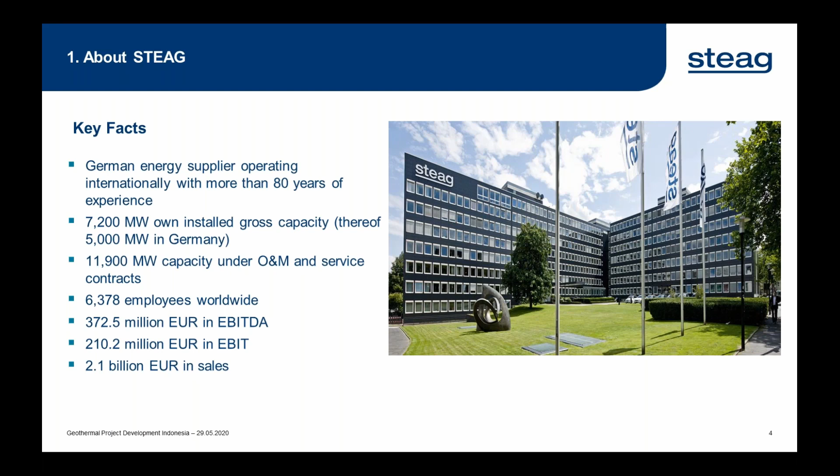The framework conditions in the power market in Indonesia are in general very promising. Indonesia has an installed power capacity by the end of 2018 of about 65 gigawatts. Most of the power is distributed in the Java-Bali grid and the Sumatra grid. This power grid is operated by PLN, the state-owned monopoly for power distribution in Indonesia. The rest is distributed by direct use. One of the reasons for that is that Indonesia is simply an island archipelago where a continuous power grid as we know it from other countries on the continent is simply not possible.

The power market in Indonesia is growing. Electricity sales have grown 6.4% on average since 2010 and were expected to continuously grow further prior to the COVID-19 pandemic, which has of course also slowed down the Indonesian market. The reason for this high development is on one hand that there is still a big market of private users to be connected to power, but Indonesia is also making a transition to more own manufacturing of its resources and goods, where power is partly the bottleneck.

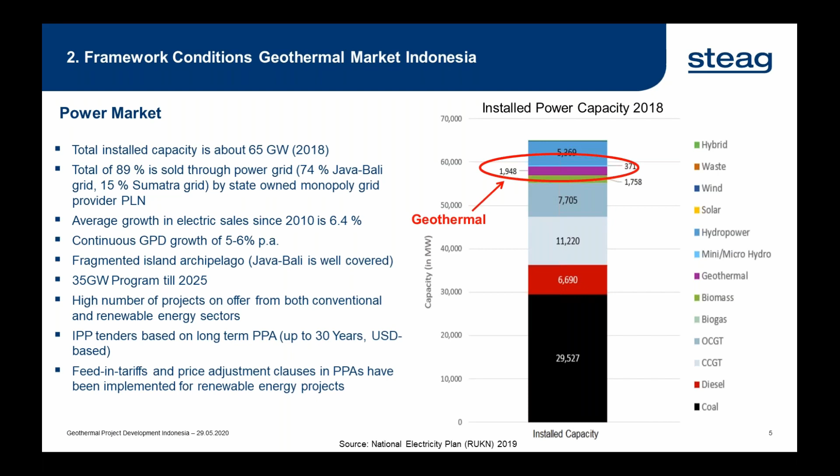As can be seen here, the geothermal part in the energy power mix is still small in the Indonesian power market, but it is not insignificant. It is growing with a target of 2,500 megawatts by this year, which was given prior to the COVID-19 pandemic. But on its own, as shown by Alex Richter in the first webinar a couple of weeks ago, it is the second biggest installed capacity in the world today, with the world's biggest potential that can still be developed.

In the future, by signing the Paris Climate Agreement and the planned fuel switch also in Indonesia, geothermal and hydropower could supply 25% of the country's energy demand.

The Indonesian government is trying to set the framework conditions to accelerate or execute this agenda. One of the key changes in regulatory framework was made in 2014, where geothermal development was taken out as mining business and put under power development business. This change was very important for the geothermal IPPs to come because it centralized the license from the local governments to the central government, and it did streamline more and more regulatory framework to have more predictability for the investment and more security.

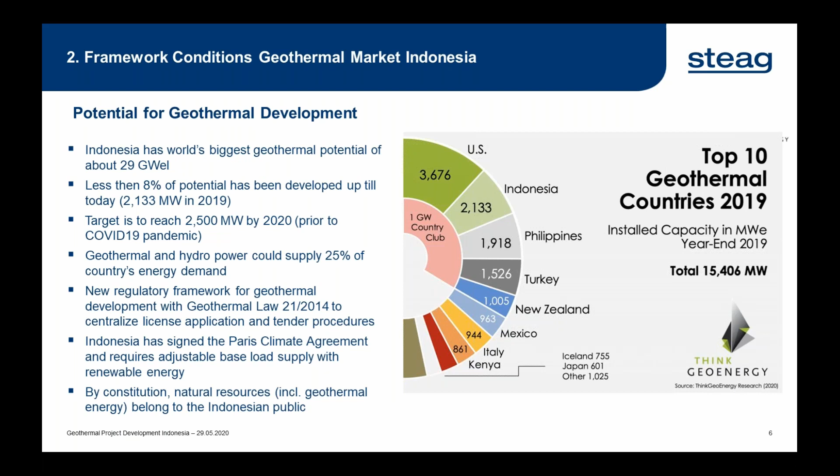The total investment will be based on the capacity that we can install from the resource. With the range that is given, it is somewhere close to $600 million, up to 980, almost $1 billion of investment.

The project is mainly held by STEAG, but by regulation and also by business strategy, we have a local partner in the country that is supporting our development. The project has a signed power purchase agreement on a 90% take-or-pay basis, giving us investment security and a validity of 30 years of power sales, which are good conditions for the long-term investment required in geothermal, and the pricing is in US dollars.

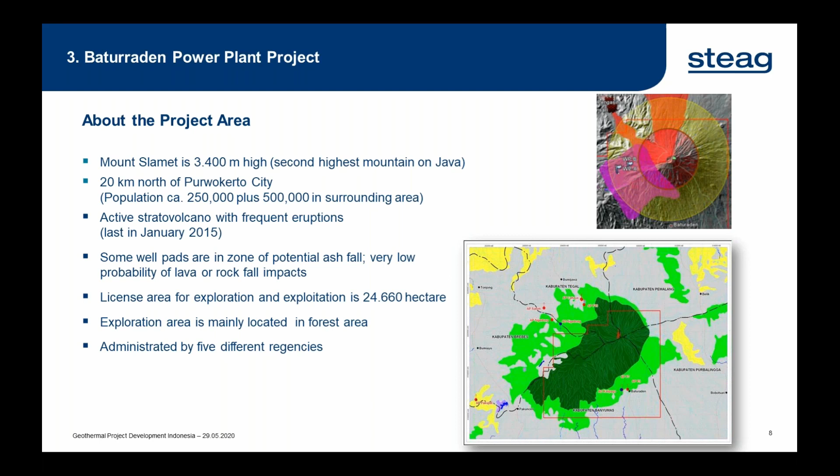When you start a geothermal project for the first time in Indonesia, or start looking at a potential participation in a geothermal project there, in most cases people realize how remote the areas are and how difficult they are to reach. In our specific case, we had to improve the conditions of the last 18 kilometers of the existing public road, which runs from the main highway, even though it's more of a smaller highway, up the volcanic mountain. And to allow the arrival of trucks for the drilling rig and later for the power plant, private land had to be purchased to widen the road.

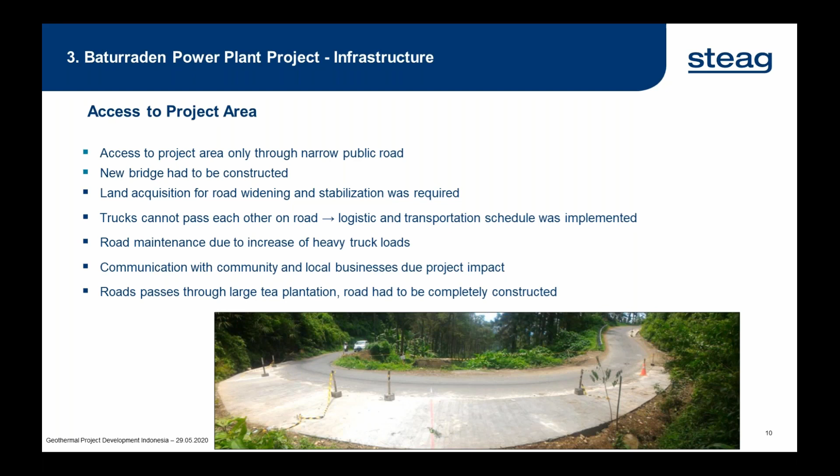An example is shown in the picture here, where you can see in the lower part that we widened the road with concrete to realize the turning radius for the trucks to come. You also have to do very much maintenance, because those roads in remote areas are not designed or constructed for such a big development. In our case, which is sometimes necessary, we even had to build a bridge to pass a river. The Baturraden project is located behind a tea plantation area, which had only a rudimentary road, so we built a completely new road into the forest, which was heavy work, but gave us the opportunity to build this road based on our specific needs and purposes.

I have here pictures to give you an impression of the location of such areas. In the left picture, you can see the bridge that we constructed. There is a big steel pipe where the river flows through, and around the steel pipe we built gabion walls to resist the weight of the drilling rig later. The main part of this road has a width of 4.5 meters, not giving trucks the opportunity to pass each other.

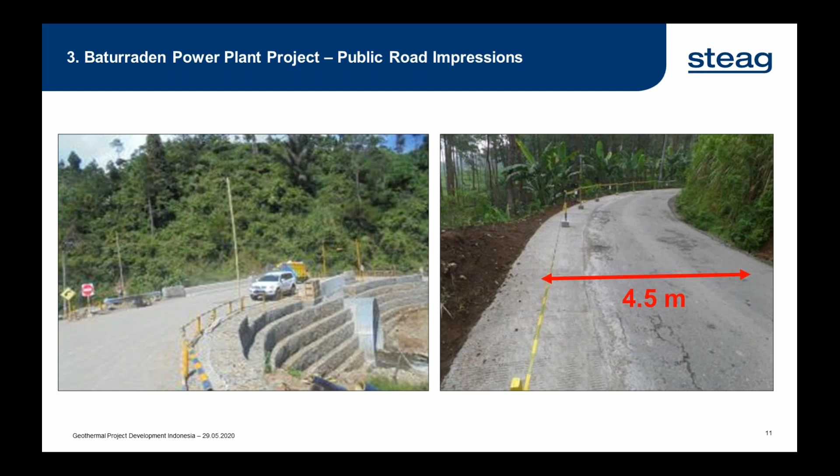So if a truck is on the road, there can only be trucks going uphill or downhill, and that requires many logistic challenges. On the forestry road, like I mentioned, we were able to construct more generous roads where trucks can pass, but of course, in exchange, the civil works required to achieve this were not insignificant.

The well pads and future power plant are located in the Baturraden project, after passing this tea plantation, in a forest. This forest is very remote, which gives some advantages. You might also see in other geothermal projects in Indonesia that you don't have direct impact on a population. That's project specific. There are also large scale power projects, like in Sumatra, where you are very close to villages, but we have the benefit of developing without neighbors, if I may say so.

But of course you have to cut trees in the forest, and you have to do revegetation over twice the area of space that you utilize for your development. On those volcanic areas, you have very rough topographic conditions. This picture I'm showing is an actual picture, like all the pictures in this presentation, from our development in the field. The height of the cut slopes there is about 60 meters.

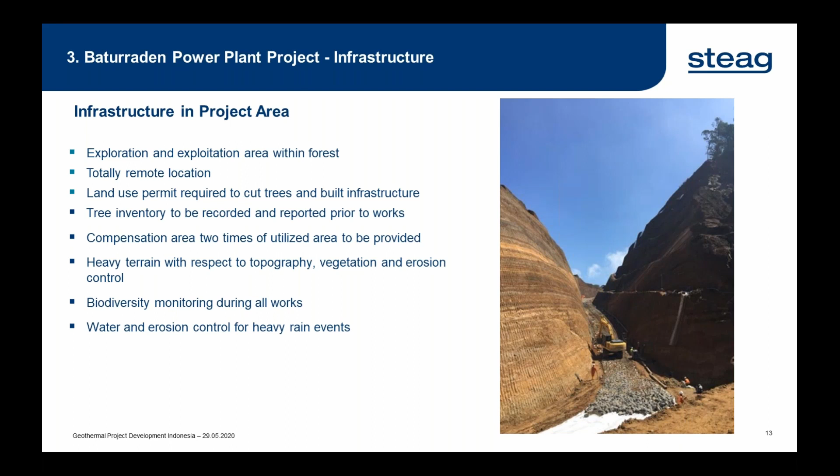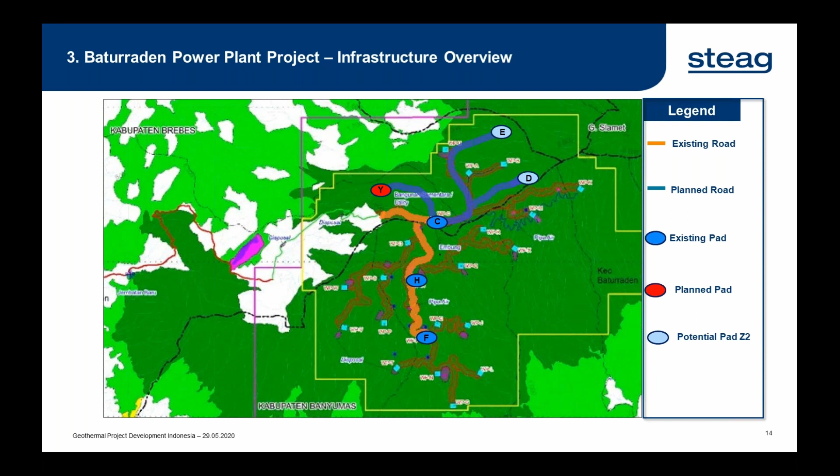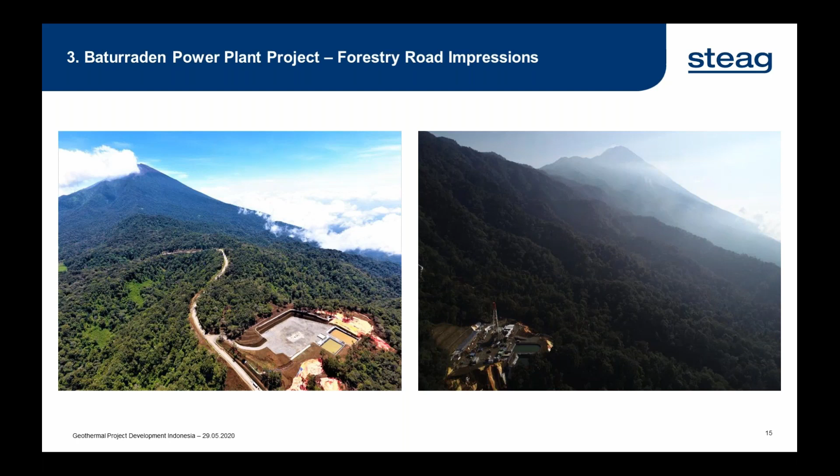When it comes to drilling, which is one of the biggest cost factors for geothermal development, also in Indonesia, you have access to a very professional and well-established drilling market, mainly because Indonesia is an oil and gas producing country. This also means that drilling prices, like in most countries, are impacted by the demand of the oil and gas industry and consequently the oil and gas price.

And like in most countries developing oil and gas, you have high restrictions or high requirements for safety and logistics to operate drilling rigs. That's making geothermal drilling in Indonesia very cost intensive. That's one of the factors impacting or limiting the speed of geothermal development in Indonesia.

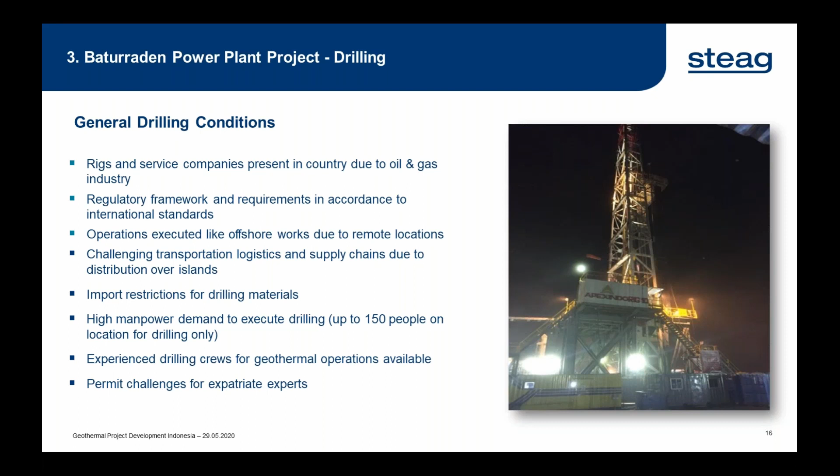It is the country with the most expensive geothermal wells, in my opinion. The reason is that you need a high amount of logistics because you're on an island archipelago. Drilling rigs have to be transported by maritime routes and trucks through those remote areas. You also have to import almost every piece of equipment. The good thing is you have a very good market with good people in the country.

Our experience during drilling, in the specific conditions when we started the drilling campaign, was that we had a difficult surface section in the hole where we lost almost continuous mud circulation. We had boulders coming into the well, leading to damages, and later clay that gave us a hard time. The good thing is that you have an oil and gas market in place and professional contractors available, so all the challenges we faced could be resolved.

In our case, it involved implementing air drilling and stiff foam drilling, non-continuous circulation systems, changes of bit technologies, and very specific cement slurries. But one of the keys that, in my opinion, enabled the drilling of those very difficult wells was a fast decision-making process within the group, which I believe is one of the core conditions for doing geothermal drilling successfully.

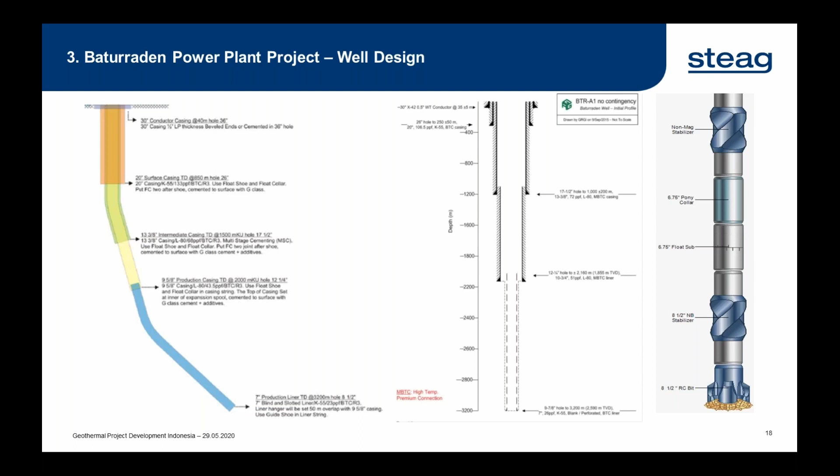This is just a quick slide about the original well design, to show that in Indonesia, like in most high enthalpy geothermal fields, the standard well design can be used. Later, during exploitation, many operators make specific adjustments based on the brine composition and enthalpy. For example, in Sumatra they use additional casings and also bigger size casings. But when you do exploration, you have the opportunity to use standard well design, and therefore good access to equipment and materials.

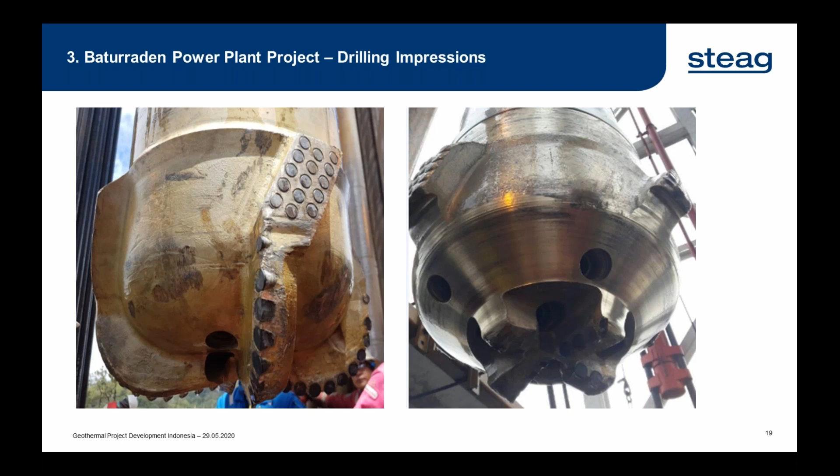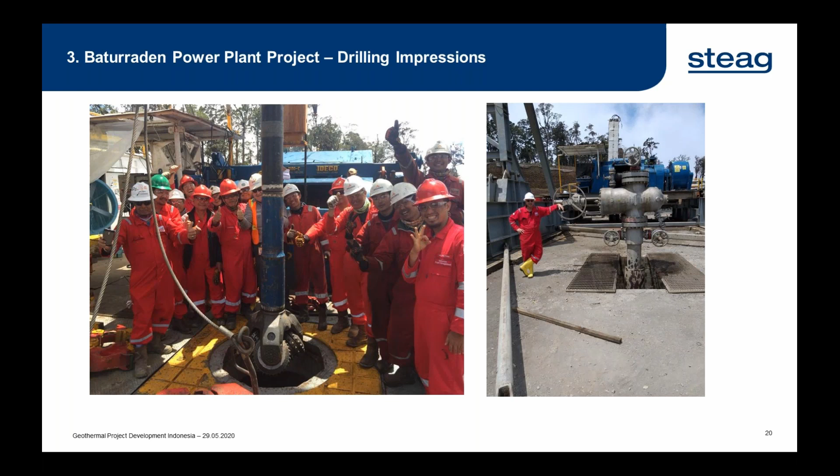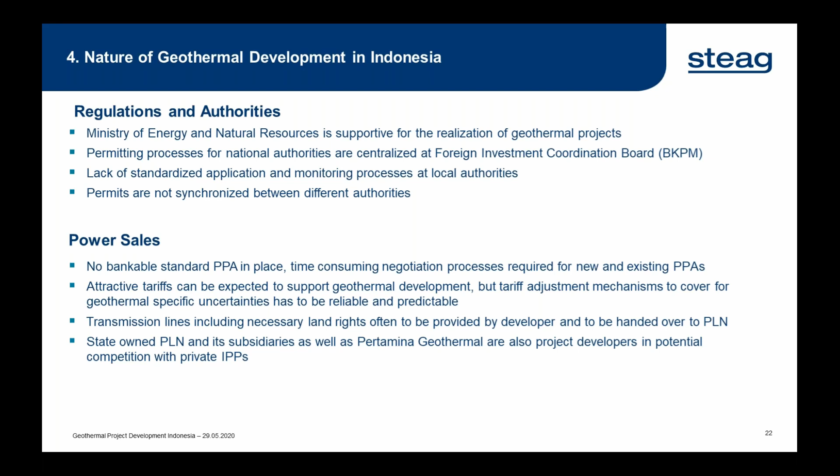For the operations, the biggest thing to highlight is the remoteness of many fields, which, in combination with the rough terrain, makes logistics, time, and construction very challenging, and in the end also has a high cost impact.

We always say that logistics and warehousing for drilling are exactly the same as offshore drilling. You have to have all your tools and equipment on location, pay rent for everything on location, because you have no access on short notice to the things that you might need.

One of the things in Indonesia is that it has, for some jobs, still a limited talent pool, so you have to choose talents well when starting in Indonesia. When it comes to specific geothermal expertise, Indonesia has educated its people very well, and geologists or drilling engineers with high qualities are available in the country already.

They have the same challenge as every geothermal country today: the easy projects are gone, I would like to say. So the nature of geothermal projects is that they are getting deeper, they are getting more challenging. On the other hand, the industry is also getting more experienced.

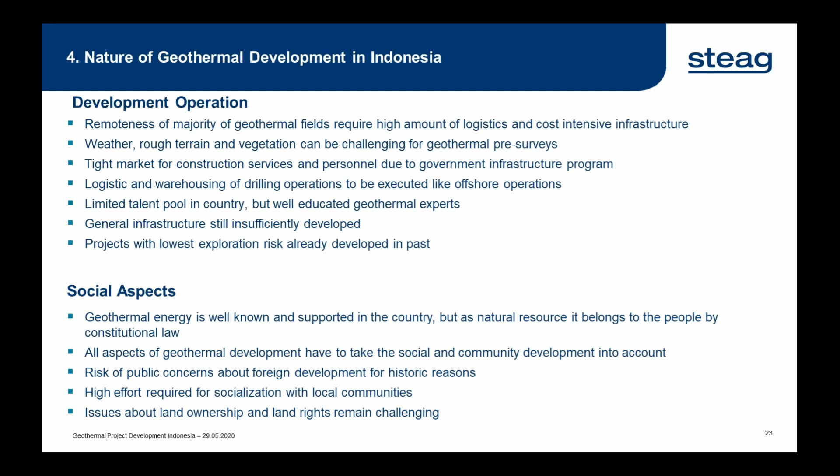The challenge could more be around power sales, because many of those projects are not on Java, Bali, or Sumatra islands. They are on other islands where the geothermal potential is partly high, but you don't have the power off-takers present there yet. So power sales becomes a very common issue when we are discussing projects in this temperature range.

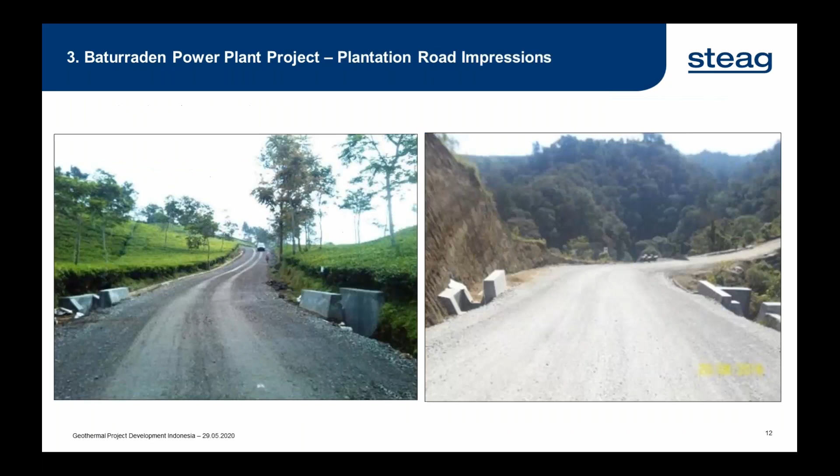We don't have an answer to that because we have not produced fluid so far. Is there any surface manifestation in the Baturraden field? And if the exploration includes the geochemistry method, how much is the temperature of the reservoir in the Baturraden field?

Yes, we have surface manifestations, mainly three. We have hot springs in the south called the Baturraden Springs, hot springs in the north called the Guci Springs, and a gas seep in the center of the concession with H2S. We were not in a position to measure the reservoir temperature with geothermometers, although we have done chemical analysis, because none of the surface manifestations provide saturated fluids. That's why the drilling and measurement of temperature in the hole was necessary.

Thanks. There is another question. Is there any social problem with the local community? If yes, how do you deal with it?

We had, right now we have no social problems, and we did not have major social problems so far. We had an incident where when the rig was arriving, we obviously did a lot of wear and tear to the public road, and the community around us strongly asked us to repair the roads, which in the end we did, but we needed to explain that we had to finish the truck mobilization before it made sense to repair the road. As an example, bringing a drilling rig to this location, including casings and all the drilling services, requires about 200 trucks that you have to bring up this road.

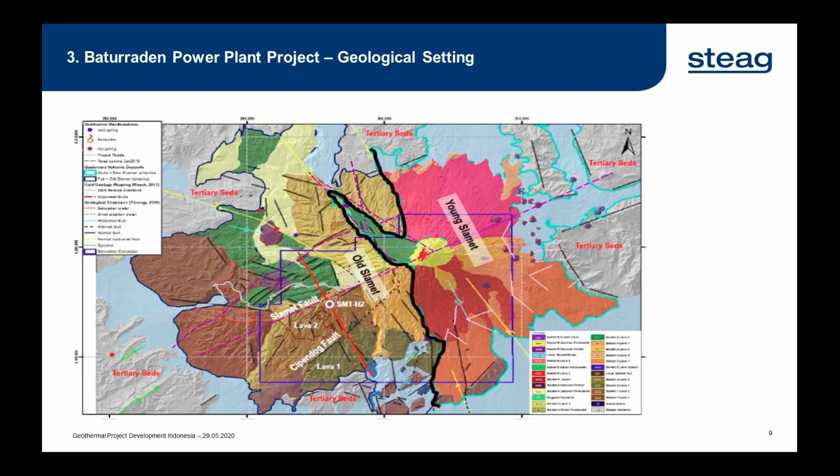Here is another question. You mentioned wireline logs. Does this include borehole image logs as well? No, so far we have not done any borehole imaging. We were focusing on the resistivity logs.

Another question, has STEAG considered slim hole exploration drilling at Baturraden? Yes, there was a long process in checking the technology. The challenges were that the infrastructure you needed anyway was a big part of the costs, and in my personal experience, because the first wells were deeper than 3,000 meters, you needed 3,000 meter slim hole wells to get sufficient information from the subsurface. There was a big question if slim holes could reach economically and safely this depth, especially when it comes to the torque.